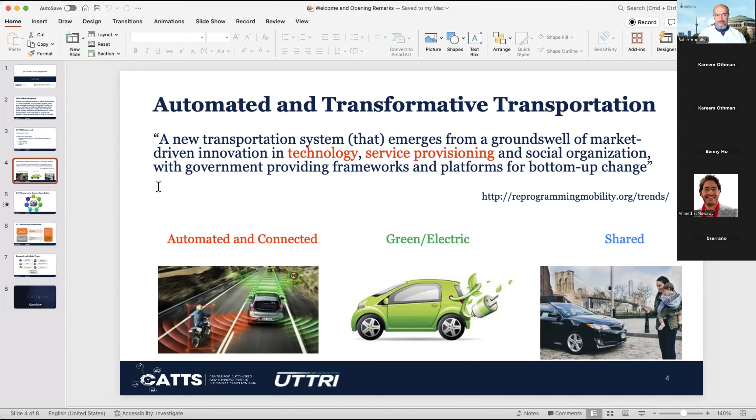But obviously, the elephants in the room are the so-called ACES, which are automated and connected vehicles, electric vehicles, and shared mobility. In CATTS, we try to ask the key questions because we don't want to speculate. For instance, you hear speculations that automation would increase demand and increase urban sprawl. Others say no, it will increase the capacity of the infrastructure and hence help congestion. So there are positive and negative speculations about the ultimate impact of these new technologies.

So in CATTS, we try to take an academic approach to this, where we identify the key questions and then analyze demand and supply. Is demand going up? Is supply performing better, or is it the opposite, that demand will go down? And perhaps the capacity of the roads will also go down, because adaptive cruise control, for instance, leaves quite a bit of space in front of cars, and therefore there will be a deterioration. So we have to analyze what the true impacts are on demand, supply, and system performance, and quantify the effects in numbers. Is it 20% improvement, 40% improvement, or the opposite?

And then predict future scenarios, how cities will evolve around those technologies, and come up with evidence-based research that informs policy, so policy would be based on rigorous analysis and quantitative numbers. We also try to create control systems to manage the infrastructure in the presence of those technologies in order to optimize the future system. So this is pretty much our mission.

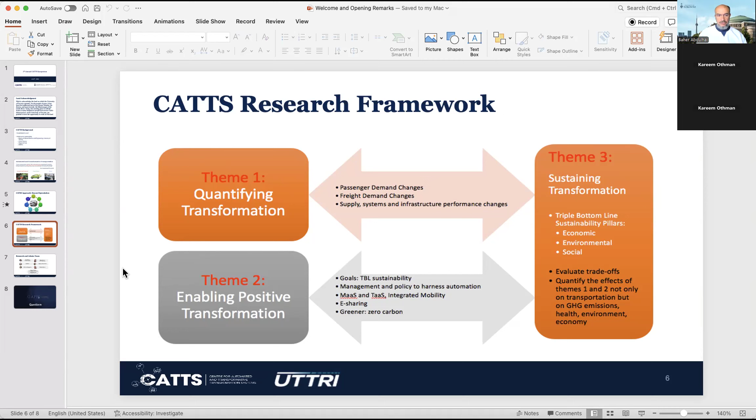So this is pretty much an intro to what we do. The professors involved in this are Professor Amer Shalaby and myself. Amer is a transit expert. Myself, I operate in traffic control and management. And then Professor Eric Miller and Professor Khandker Habib, both of them are in transportation planning and demand analysis, so the demand side of transportation.

And then Professor Marianne Hatzopoulou, she is the environmental expert in our group, and Professor Matthew Roorda, it's freight and logistics. And then we also have two staff members, Dr. Kareem Othman, who is a postdoctoral fellow, and Dr. Toka Mohammed, who is a research associate.

So this is just a quick overview of who we are. I'll stop there and need to stop sharing.

And then today we have a full day ahead of us. We'll start with a session on traffic AI in the morning, and then we'll take a break at 10:45, and then we'll go to another session on behavioral modeling in the context of emerging mobility. Then we'll have a lunch break, and then we'll have a guest speaker from the City of Toronto, Mr. Roger Brown, who will talk to us about transportation challenges in Toronto and the way forward. And then we'll finish the day with a session on innovations in freight, logistics, and air quality modeling.

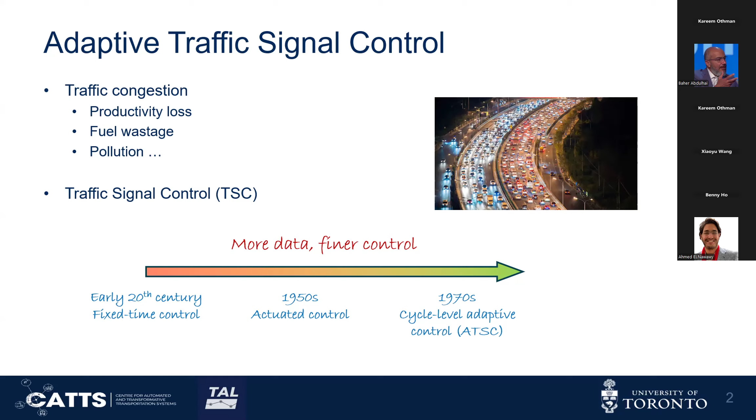But till today, there are many people, my friends, my colleagues, who come to me. They heard that I'm doing traffic research, and they just ask me, why am I experiencing this? Sometimes I'm driving towards an intersection, and it seems like I'm the only vehicle at this intersection, but I still got a red light. They start complaining, what are these traffic guys doing? Are they doing something wrong?

So based on this question, we will see another more concrete example of why this is hard to resolve. But as a result, today we're pursuing having modern second-level adaptive control solutions.

For example, if you have cycle-level adaptive control, it's hard to make individual vehicles satisfied, because in that case you're optimizing over traffic flows. That's why we need even more fine data and even finer control.

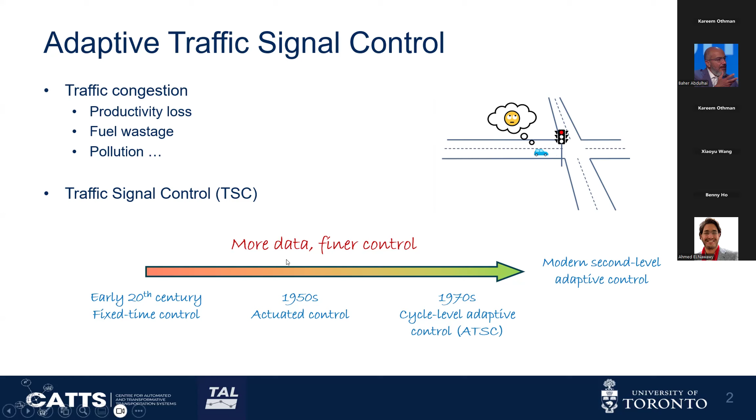So ideally, if we say we're controlling a corridor or even a network, an ideal approach is to have an Oracle centralized agent which observes globally and optimizes the target subnetwork globally. But the downside is that it's intractable, it's too complicated.

So from the learning perspective, we can have multi-agent collaboration, for which we developed a method called eMARLIN, the basic eMARLIN. When we are controlling either a corridor or network, we have a set of agents which each control an individual intersection, but they're not independent. Each of the intersections will collaborate with its close neighbor.

So the agent will first compress the raw observations with the eMARLIN encoder. Then these embeddings will be broadcasted to the immediate neighbors, and the neighbors will aggregate all this abstracted information, which is an abstraction of the raw observations of each agent. After aggregation over the neighborhood, agent I will make a decision based on this joint abstracted observation. It saves us computational complexity, and it also saves us communication complexity.

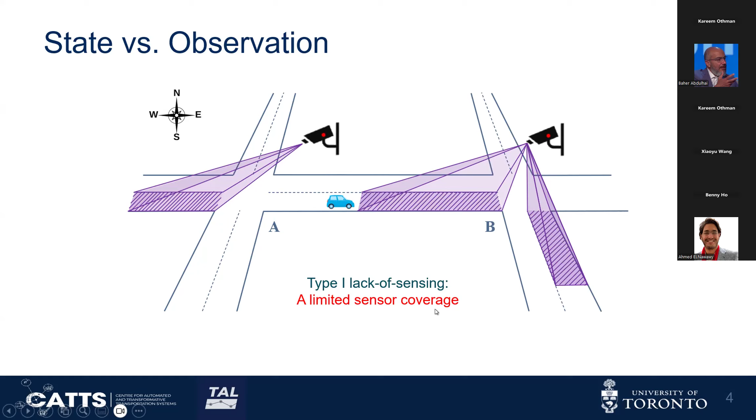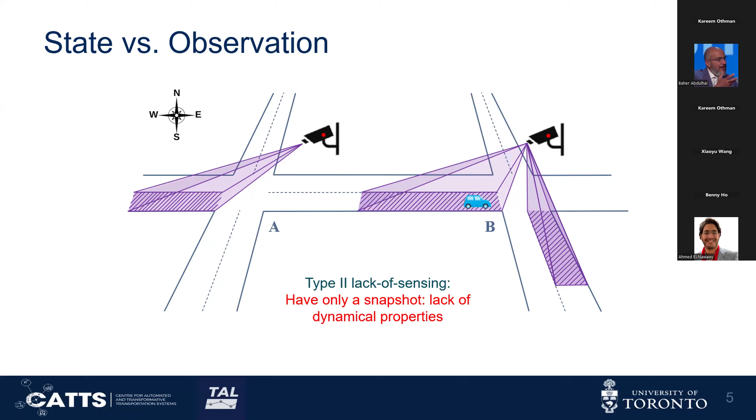So this vehicle keeps moving forward and joins the detection area of intersection B. Then there's a second type of lack of sensing: we only have a snapshot of the real world. There's a lack of dynamical properties, because with the surveillance camera you can use modern computer vision technologies to capture the position of the vehicle, but what about acceleration rate and whether the pedal is pushed down? All those dynamical properties you can only estimate from the videos, or from the differences between frames of the video. You cannot get precise traffic states in this sense.

So with those two types of lack of sensing in mind, let's take a look at this scenario, where you have a platoon of three vehicles coming eastbound and a single vehicle coming northbound. Currently intersection B should be eastbound green, not northbound green, but anyway it's idling because no vehicle is in its detection area. Meanwhile intersection A sees the platoon and allows it to pass through, because this is the only movement where there are vehicles.

17 seconds later, this vehicle approaches the stop bar, and intersection B sees there's no eastbound vehicle in A or B, in both detected covered areas there's no vehicle at all. So maybe it should allow the northbound vehicle to pass through first. But notice, once this intersection changes phase, it will suffer from a blackout period, because the traffic light will go through the yellow phase, the all-red time, and serve the minimum northbound green time, which is usually determined by the intersection layout.

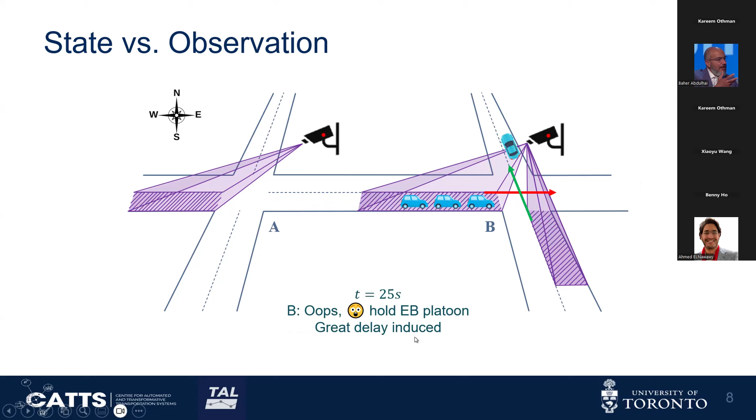But as B is not able to see the three vehicles, it allows the northbound vehicle to go through. But 8 seconds later, it starts holding the eastbound platoon, and a great delay will be induced because of the blackout period.

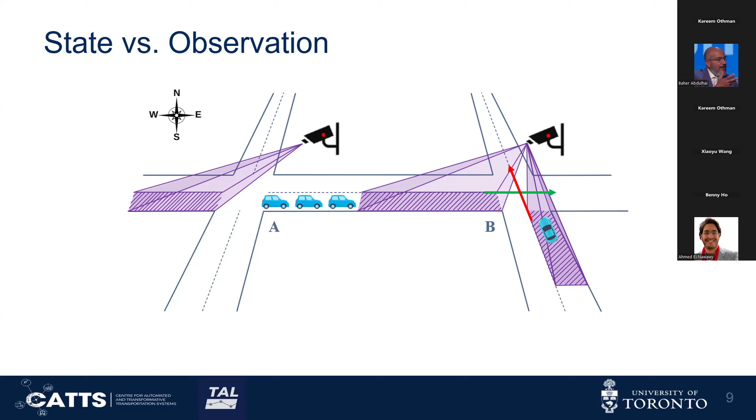So we don't want the agent to make these kind of unintelligent, unwise decisions. What can we do? At t equals 17 seconds, what else can the intersection be aware of rather than the raw observation, which is like video readings? Is there a hint of the existence of this platoon?

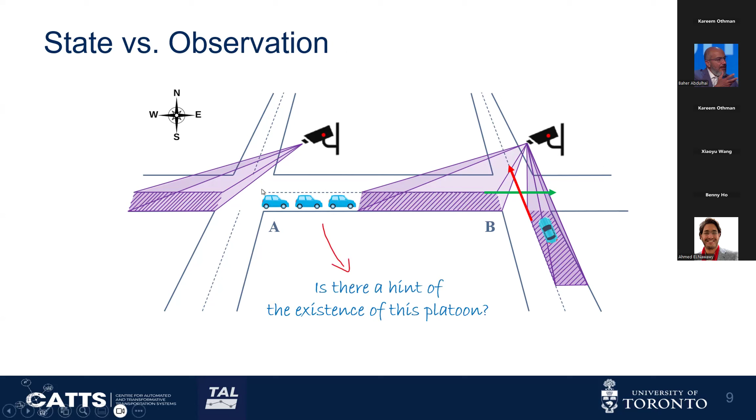Luckily, the answer is yes, because if you recall, 10 seconds back this platoon was released by intersection A. So it existed in the history of the sensing from intersection A. So intuitively, we would say history matters.

We can augment the agent's input with a short history of the observations. This is not a tutorial on reinforcement learning and Markov decision processes, so we'll just say mathematically there was a non-Markov issue in this case, and including the history will compensate for that. It will alleviate the problems caused by this non-Markov property.

The history of observations in each agent and the executor of the eMarlin architecture stays the same. What about the complexity of the data input? For example, if you put 20 seconds into the history, then your input space is exploding. So in order to handle the sequential data efficiently, we introduce transformers.

This is a cornerstone, the backbone of modern generative AI technologies. Most people use ChatGPT or some large language model, and Transformer is exactly the backbone of those models. However, reinforcement learning is sensitive to neural network architectures, and Transformer, on the other hand, suffers from large memory footprints and high latency.

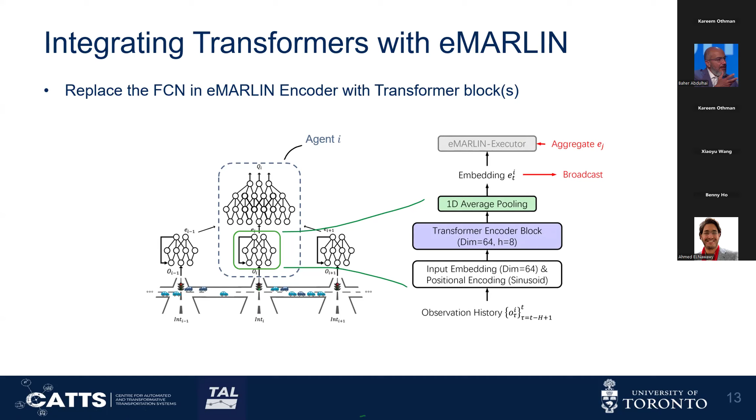So in our research, we put the transformer block into the eMarlin encoder module. Beyond that, we need some other better practices which enable eMarlin to work well, because we need to address the two adaptive issues we previously mentioned. In terms of implementation practices, in this work we're using the canonical transformer block, which is the most classic one.

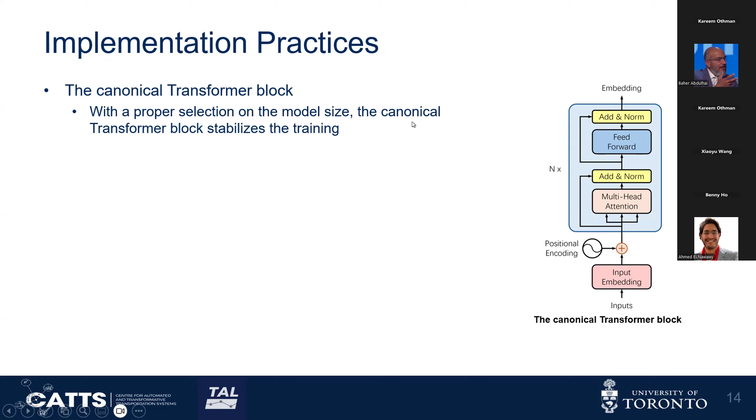We noticed that with the proper selection of the model size, the canonical transformer block can actually stabilize the training. It can avoid the issues mentioned before, like the large footprint requirement and the unstable learning when transformer and reinforcement learning happen together.

Secondly, we noticed that in our case, sequence alignment is important because you want to have a semantic meaning for the sequences, and the current time slice is the most important one. When you're dating the current slice back to a horizon of H, you want to align each of the sequences to the current slice, which tells the agent which frame in this sequence it should really focus on.

Thirdly, we need to do padding and masking properly, because if you don't mask out void slices, those zeros actually have meaning in traffic states. For example, it could mean there are no vehicles, the vehicles stopped, no speed, and so on. So you can't just let those padding slices go through the whole eMarlin architecture.

Why do we need to have the partial observability, PO, addressed? The benefit is that with PO being addressed, we can develop a sensor-agnostic architecture. This whole solution can be adopted to any sensor scheme you have in mind.

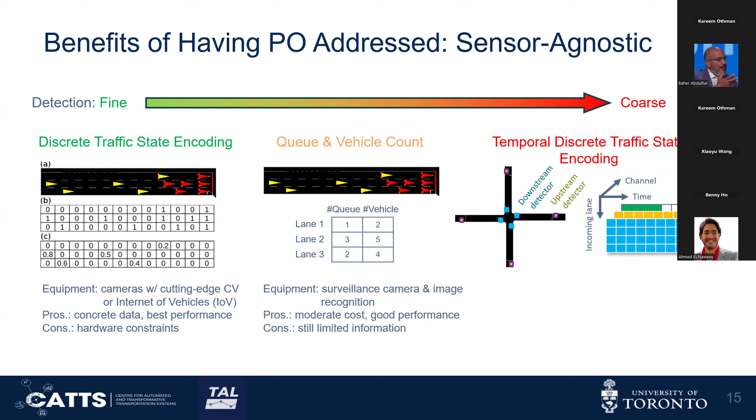So how can we show that eMarlin X is this powerful? We do experiments in the York Region, where the central intersection is the Yonge-Steeles intersection, and we focus on controlling the 5 intersections along the Yonge corridor. We strictly adhere to the FHWA NEMA scheme. Although we're doing second-level adaptive control, we don't allow deviation - we strictly adhere to the policy constraints.

This is what we call a constrained variable phasing scheme, developed according to the NEMA scheme. Regarding the reward, we're counting the queue length, which is equivalent to the stop time.

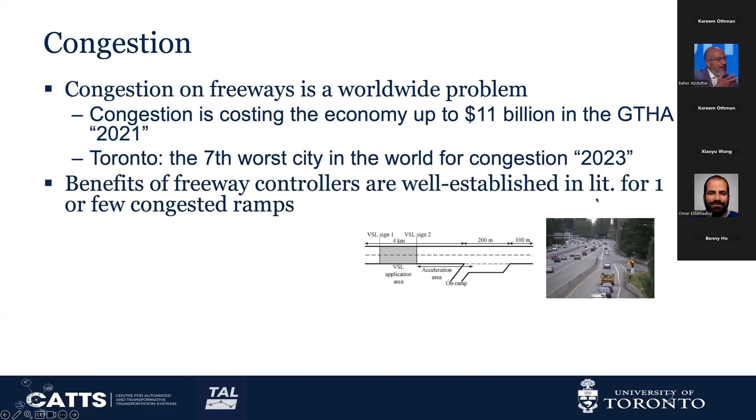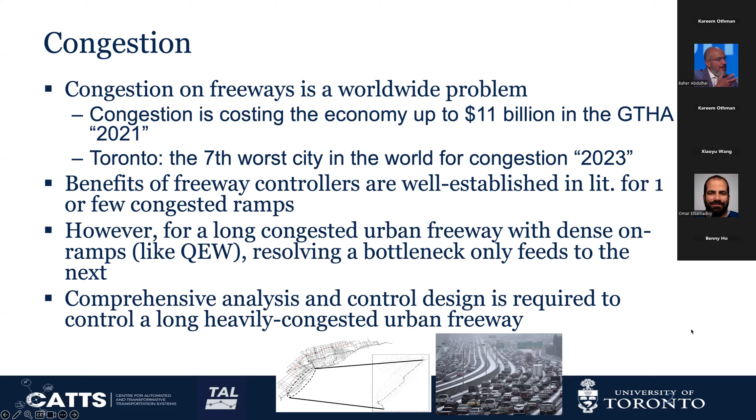Benefits of freeway controllers are well established in literature for one or a few congested on-ramps. However, for heavily congested urban freeways like the QEW or 401, resolving one bottleneck only shifts it to the next. So we need to do comprehensive analysis, and a new design for a controller is required to control such a freeway.

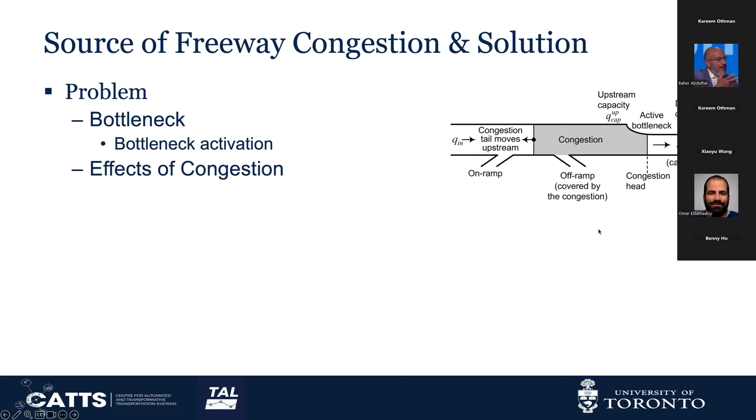First, let's talk about the source of congestion on a freeway. The problem is a bottleneck, a location where the flow capacity upstream is higher than the flow capacity downstream. Whenever the arriving demand from upstream is higher than the capacity downstream, congestion is triggered, and we have two negative effects: first, capacity drop, where the output flow from this bottleneck is lower than the capacity of the bottleneck, and blocking of off-ramps.

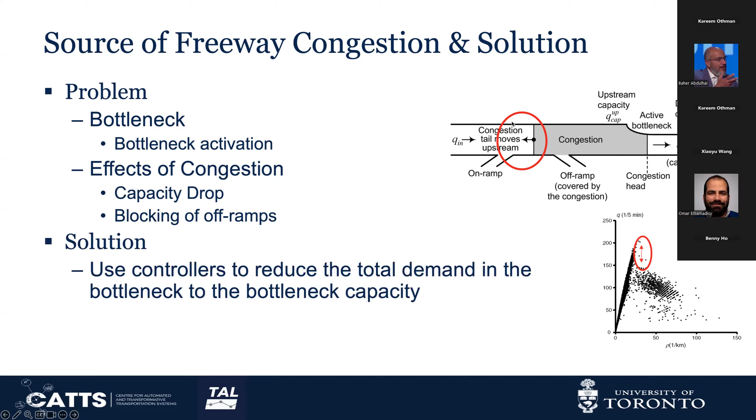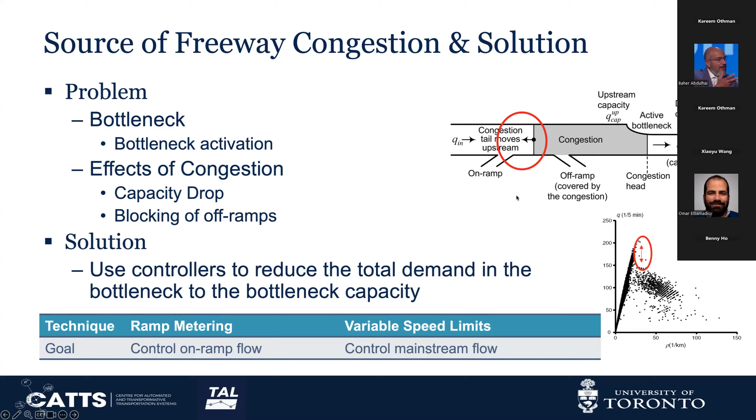When congestion occurs, vehicles start queuing and congestion grows upstream, blocking off-ramps. Vehicles that want to exit the freeway keep waiting, increasing congestion and travel time for everyone. The solution is to use controllers to limit the flow entering a bottleneck location to the bottleneck's capacity. This can be applied through ramp metering, by controlling the flow entering from the on-ramp, or variable speed limit, by limiting the flow entering from upstream.

There's also the same integral regulator rule for variable speed limit, which controls the speed upstream based on the same rule and goal density. When we apply both together, we apply ramp metering first, and then variable speed limit is applied whenever ramp metering fails to resolve congestion. All controllers are implemented using Aimsun APIs.

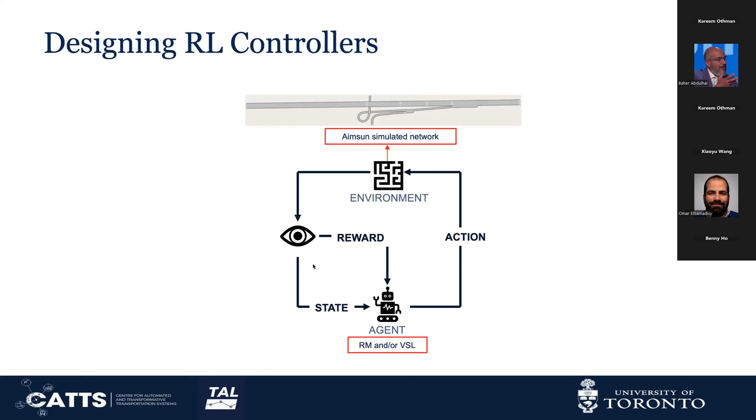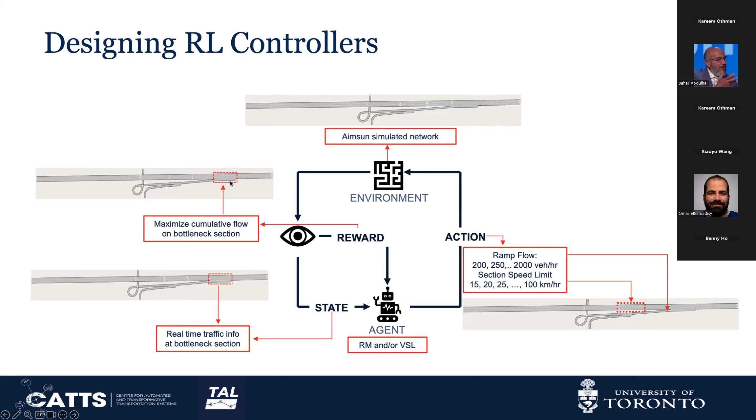When we design a controller using reinforcement learning, the agent is either variable speed limit or ramp metering. The environment is the traffic network, the Aimsun simulated network. The state is the real-time traffic info at the bottleneck. The action is either the ramp flow or the section speed limit, or both if we want to apply both. The reward is simply the output flow from the bottleneck, which reflects total travel time. If we maximize output flow at the bottleneck and get more vehicles out, that's equivalent to minimizing total travel time at this location.

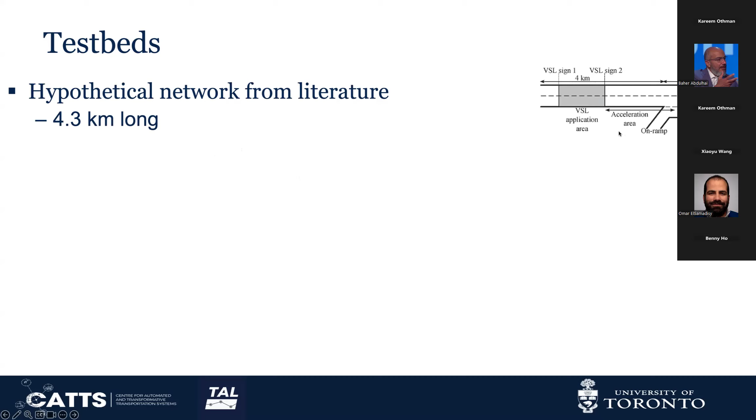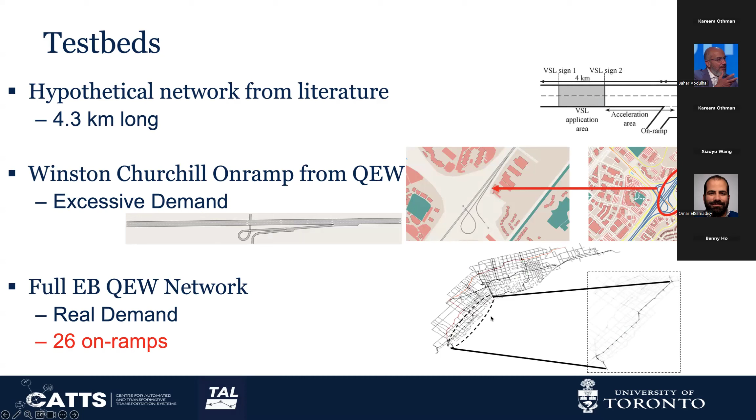We applied these controllers, both reinforcement learning and regulator-based, on several test beds. The first is a hypothetical network from the literature, very popular in the literature. Then we have Winston Churchill on-ramp from QEW with excessive, very high demand. And then we have a full eastbound QEW network with 26 on-ramps with calibrated real demand, which we applied the controller to.

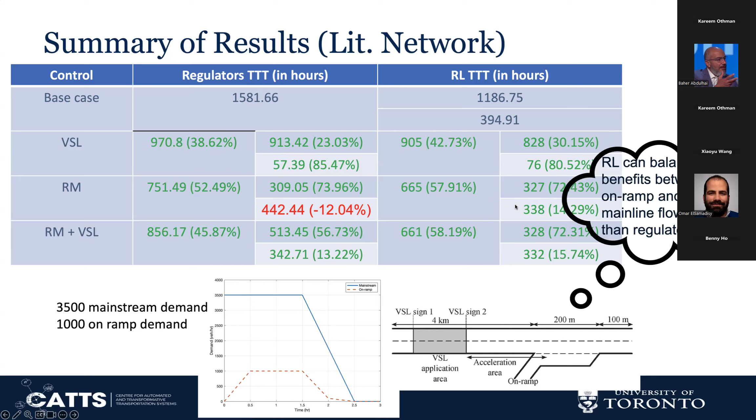So all are benefiting. When we go to the tertiary network with excessive demand, we see a 3-lane freeway, not 2 lanes, with 6,000 vehicles coming from the mainstream, almost at capacity without adding any ramp flow. So we can see clearly that we have critically high demand.

In this case, variable speed limit applied to the mainstream is not very effective - we only get about 0.3%, or at maximum using reinforcement learning, a 3% decrease in total travel time, while ramp metering is still effective even in this highly congested scenario, getting benefits still in the range of 44-45% decrease in total travel time. We can learn that at very high congestion, variable speed limit might not be very effective.

So we take these results and apply them to the QEW network. For the full network starting from Hamilton to the Gardiner Expressway, applying ramp metering gets us about 14-15% benefit when ramp metering or coordinated ramp metering are applied, while variable speed limit is only 3.25%.

When we look at the heat maps, we can see clearly that variable speed limit is not very effective - only about 3%. When we looked into the reasons behind that, we found that the back-to-back ramps feeding more vehicles into the freeway is a very challenging condition for applying variable speed limit, because variable speed limit needs space.

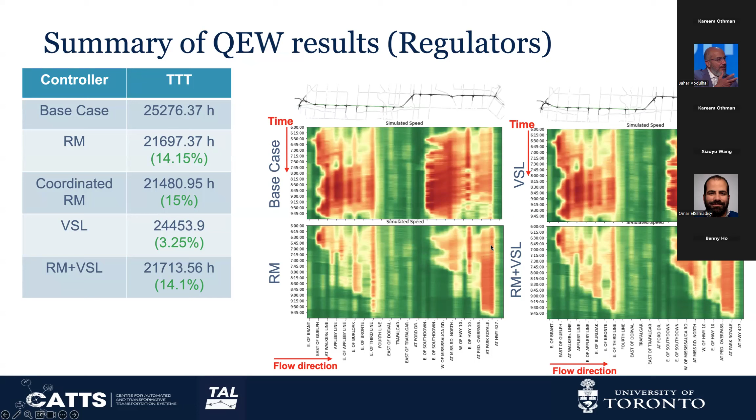So we looked into each region individually. We found that upstream at early regions, like Third Line and Erin Mills regions, we can get very high performance from ramp metering, like 40%, 50%, and sometimes more, like in Erin Mills.

However, we lose part of this benefit downstream when we go to Cawthra or Dixie region. We have an uncontrolled scenario where vehicles have very high demand coming from upstream, so we can lose up to 77% and 65% increase in total travel time.

So for ramp metering, we give priority to mainline demand, and for a large network, we have significant benefit upstream, which we push downstream, that can increase the delays and create a very challenging situation downstream.

For variable speed limit, when we have higher demand or very high congested scenarios, variable speed limit alone is not enough, and it gives priority to ramp demand. However, we don't have space to store vehicles on the mainline.

Taking these results, we design a ramp metering solution for QEW in collaboration with Xiaoyu, as discussed in the traffic signal work. We adopted and extended eMARLIN for traffic signal. We design the controllers such that all upstream controllers look at downstream ramps and collaborate with them.

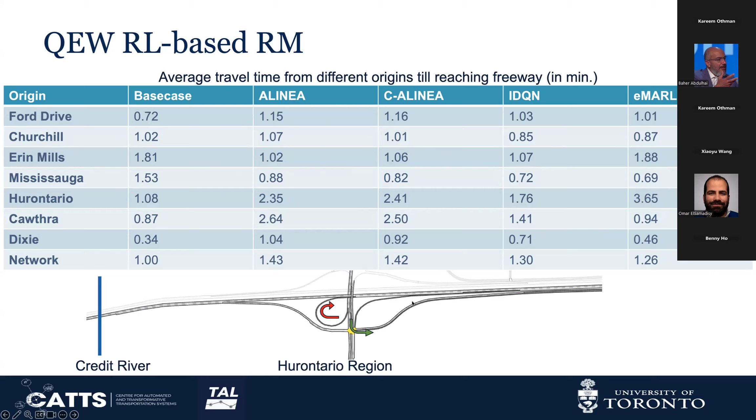Conclusions from this work: any control in any case is better than none, for QEW or isolated ramps. Whenever we apply control, we get some benefits. For ramp metering, it's better than variable speed limit in highly congested scenarios.

Reinforcement learning based controllers outperform regulator-based ones. We have significant benefits for coordinated ramp metering compared to isolated control.

We found, as mentioned, the ability of eMARLIN to learn how to decrease or increase the flow from each ramp to control the route choice of vehicles. So it tightened the demand at Hurontario to make travelers take the South Service Road, which benefits everyone in the network.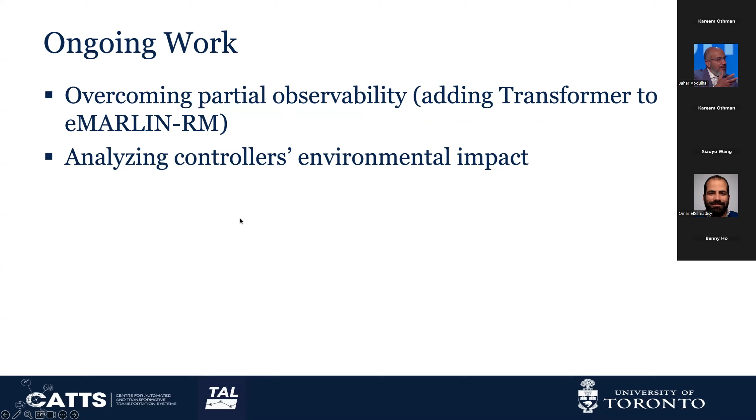For ongoing work, we are applying eMARLIN transformer to overcome any partial observability issue in our controller, and analyzing the controller's environmental impact. That's all for today. Thank you.

I'm not sure if I have to share my screen. So we have the speed reduction.

We can see that what's achievable in the simulation can be achievable in real time because we have calibrated demand, which reflects traffic performance of the real world. So if we have a decrease in total travel time or increase in speed, it can be achievable if we have a correctly calibrated simulation, which I think is the case here. We have calibrated the network so that we reflect how the fundamental diagram, or the relation between the driving behavior in Ontario on the QEW, matches what we have in the simulation.

If I understand the question correctly, he's asking how do you get people to slow down? Is it a changeable message sign? Is it in the simulator? How do you enforce variable speed limits?

For variable speed limit, it's like a message sign at a controlled section. If we look at the network, we have a controlled area where we apply the variable speed limit with a message sign. However, we didn't model a compliance rate. We modeled it so that when we put 30 kilometers per hour, everyone in this area applies 30 kilometers per hour. We didn't model how some people would not comply. However, in literature, there are studies showing that if 30% or 40% of vehicles are controlled and comply with this speed limit, everyone else will be stuck behind them and won't have a chance to overtake.

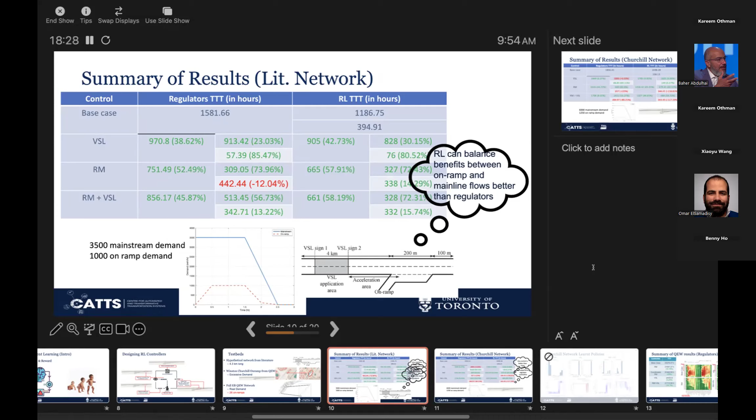Any more questions? If not, then thank you, Omar. Is there another one?

Can dynamic sign speeds be enforced? Sure, if there is a speed limit and you violate it, it can be enforced in many ways. Cops can stop people and give them tickets, or you can have radar enforcement, for instance. So the enforcement part and the implementation are not difficult. Now, what people object to politically, that's a different story, but in terms of executing the speed limit and enforcing it, the technology is readily available.

Like how speed changes at construction areas, for example, it's a variable message sign instead, and it's enforced at construction areas. If speed falls from 100 to 80 or 70, it's enforced, and if you violate it, you will get ticketed most of the time. So I think it's the same thing, but instead of having a static speed limit, it will be variable using a message sign.

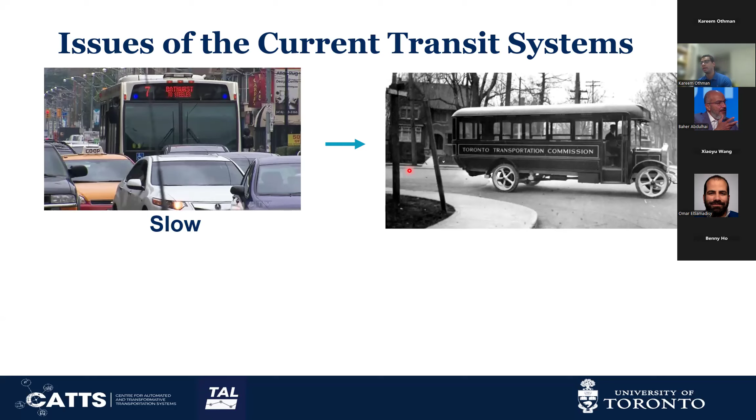Transit is frequently characterized as a slow service. When you look at the history of public transit, the current transit speed is not really faster than it was a century ago - we have almost the same average traveling speed. When transit is competing with other modes, you find that transit is actually at a disadvantage. For example, comparing transit to driving, the average traveling speed is significantly higher than average transit speed, and in some scenarios even cycling is faster than using public transit.

So what is the meaning of slow transit service? It means higher operating costs for transit agencies and customer dissatisfaction. In that case, people will start looking for other modes to shift to - they might prefer cycling, they might prefer driving, and they might shift from using public transit to other modes.

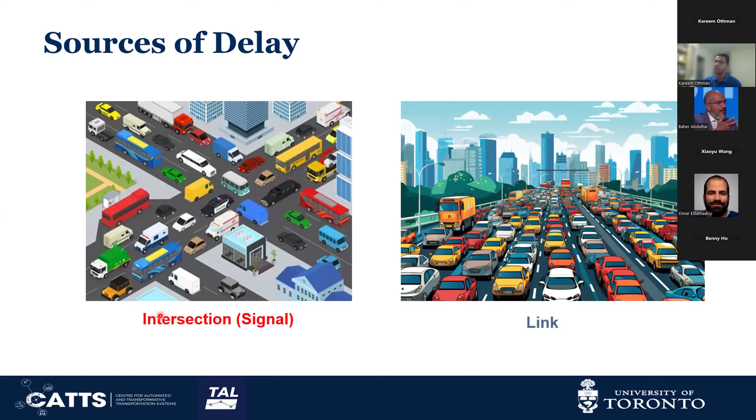So what are the main sources of transit delays? We have intersection delays, including traffic signals, and we have link delays. For our work here, we focus on intersection delays. When we look at dense urban areas, around 35% of transit travel time is actually spent at intersections, highlighting the importance of dealing with intersection delays.

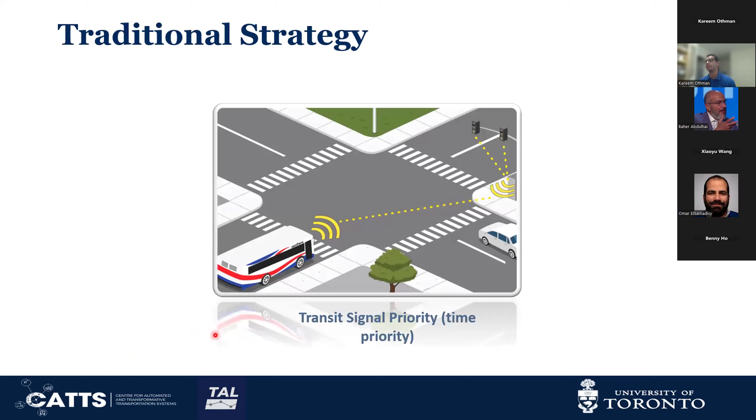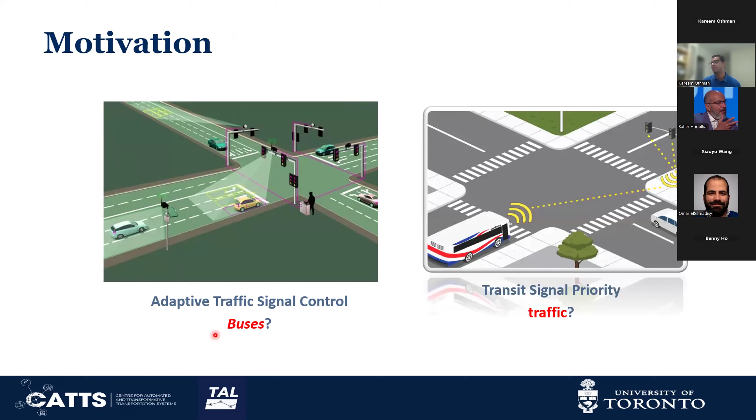Traditionally, transit signal priority will be implemented to prioritize transit at the intersection. However, the main issue is that you prioritize transit at the cost of traffic. On the other hand, adaptive traffic signal controls are mainly optimized based on traffic demands - what about buses? They don't really look at what happens to transit. And transit signal priority doesn't really consider traffic.

Again, we get back to the same picture: either prioritize transit at the cost of traffic, or do nothing and have slow transit service. So there is no strategy that actually adaptively reduces delays for both. Our main objective in this work was to provide a multimodal adaptive traffic signal control for everyone - for transit and for traffic.

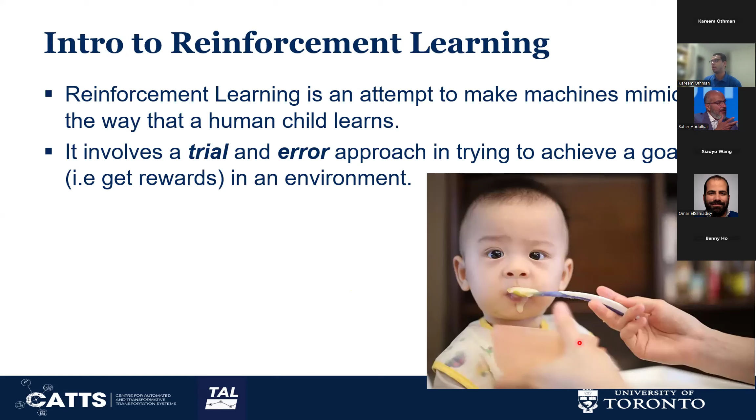So we have been using reinforcement learning. I know you should be familiar with it by now, so I'll just go over it very quickly. Reinforcement learning is pretty much similar to a baby - it actually mimics the way a human child learns, and involves trial and error in order to achieve certain goals. It learns by interacting with the surrounding world, and learns over time.

So this is a very famous reinforcement learning figure. You have your agent taking action, changing the environment, and based on the changes in the environment, the agent will receive a reward and will receive the new state of the system.

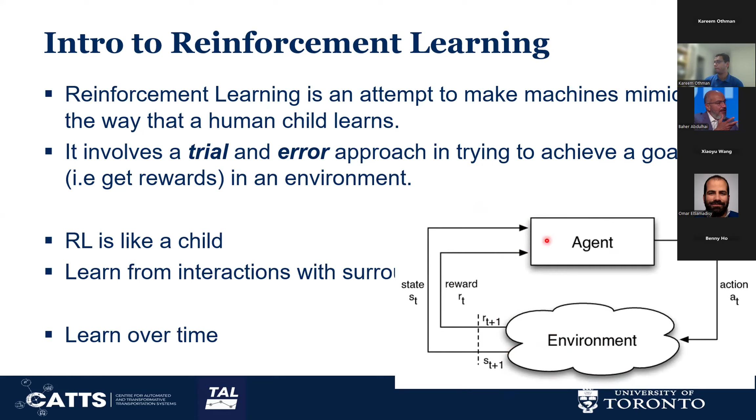There are a lot of examples for applications of reinforcement learning. I won't open the video now, but it has been used for many applications like hide and seek games, parking cars, and as you've seen in the previous two presentations, traffic signal control and ramp metering.

So we have been using it for our problem here, and again, this is the same simulation network that Xiaoyu has presented - the Yonge and Steeles intersection. Our main goal is to provide a multimodal adaptive traffic signal control to optimize conditions for both transit and traffic.

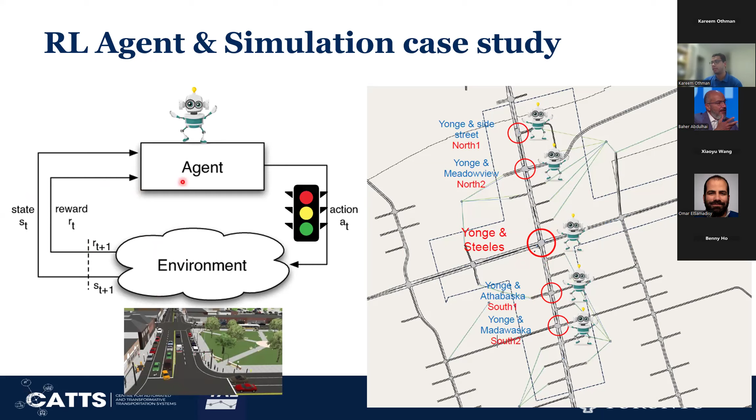In our simulation, our agent is the traffic signal controller, and it takes an action regarding the traffic signal - which direction to give the green phase and for how long. It interacts with and changes the environment, which in our case is our simulation model. Based on the changes received, the agent gets the reward value and the new state of the system.

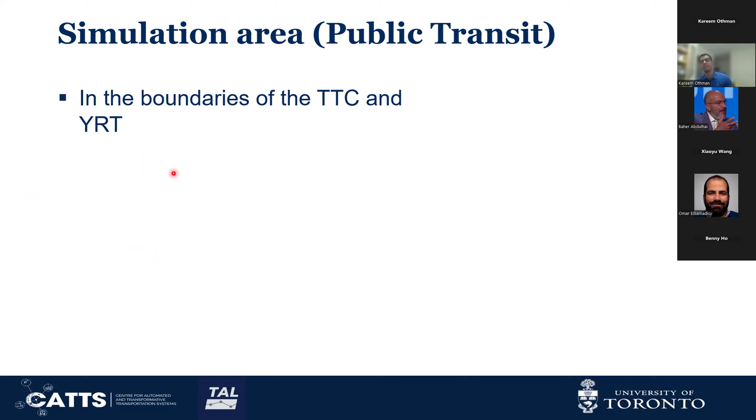Let's look at our simulation area from a public transit perspective. Our simulation area is within the boundaries of the TTC and York Region transit service areas. This is a screenshot from the TTC website showing the transit routes that use the simulation area, and we have 4 high-frequency TTC bus routes: 60, 53, 960, and 953.

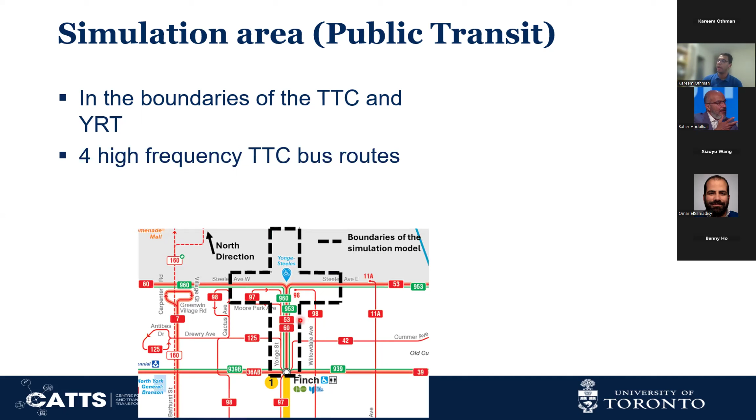When we look at York Region, Finch GO is one of the main hubs for York Region transit, and most of the transit routes pass through our simulation area - this is the Yonge and Steeles intersection. We have 16 York Region transit routes using our simulation area, with high and low frequency.

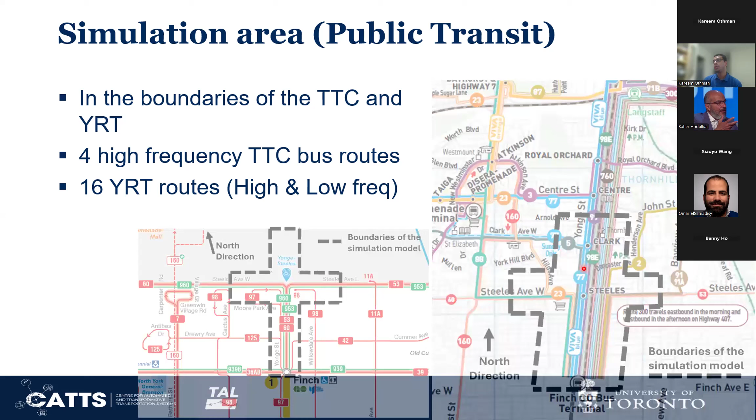Looking at the combined headway, the TTC combined headway is around 1.9 minutes, with a combined frequency of around 31 buses per hour. For York Region, the combined headway for all routes is around 1.8 minutes, showing the number of buses using the simulation area in 1 hour - a combined frequency of around 65 buses per hour trying to use the intersection.

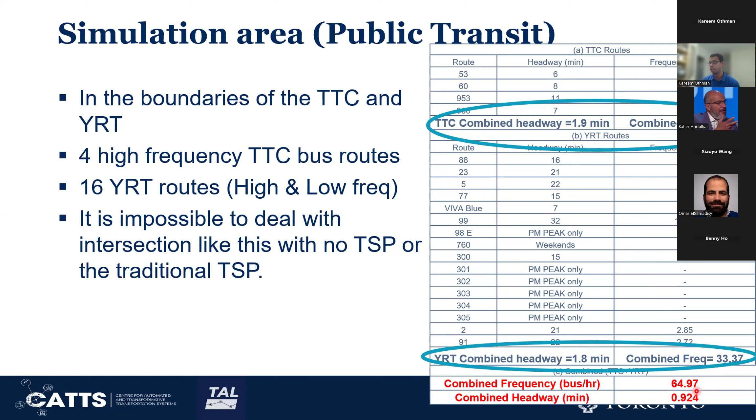It's not really possible to handle an intersection like this with no TSP or using traditional TSP, because traditional TSP systems usually consider only the first request and ignore the remaining buses entering in one cycle.

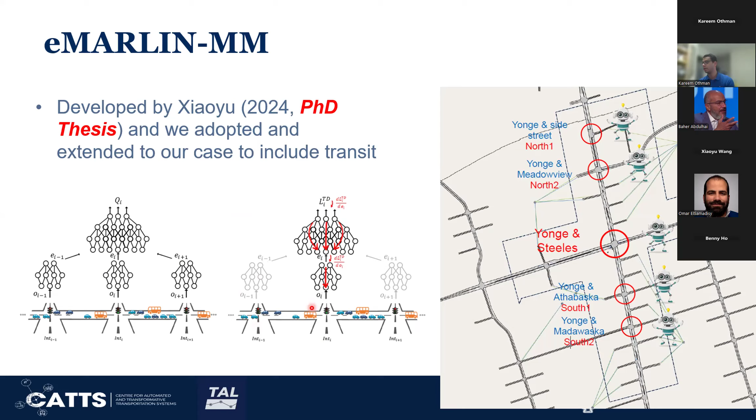We tested two adaptive traffic signal control systems. One is vehicle-based, where the main objective is to minimize vehicle delays and doesn't consider transit - a bus with 50 passengers is dealt with similar to a passenger vehicle with one passenger. On the other hand, the person-based reward tries to minimize person delay, taking vehicle occupancy into consideration.

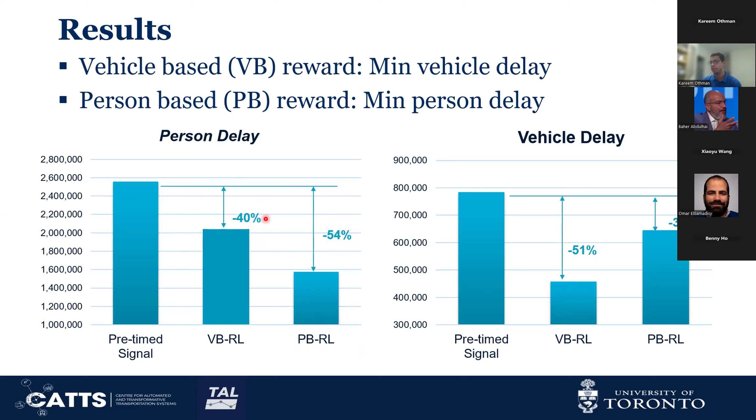But what we really care about is the person delay - trying to minimize the overall person delay in the system. Here we see the opposite happening: the person-based reinforcement learning adaptive traffic signal control achieves around 54% reduction in person delays, higher than what was achieved using vehicle-based reinforcement learning.

We then tested the efficiency of these two systems - vehicle-based and person-based - at different levels of bus occupancy. In this figure, we show vehicle delay with bus occupancy from low to intermediate to high on the x-axis, and on the y-axis the percentage change in total vehicle delay compared to the benchmark pre-timed traffic signals. At low bus occupancy levels, both vehicle-based and person-based achieve basically the same results.

With the increase in the level of bus occupancy, you will see that the vehicle-based method is not really affected, because it's just trying to minimize the overall vehicle delays, so it doesn't really get affected by the bus occupancy. But on the other hand, the efficiency of the person-based method is actually decreasing with the increase in the bus occupancy. But again, this is not what we really care about.

What we really care about is to minimize the person delay. And again, this is the same figure, but for person delays for the two methods, the eMarlin person-based and the eMarlin vehicle-based. Let's look at the vehicle-based.

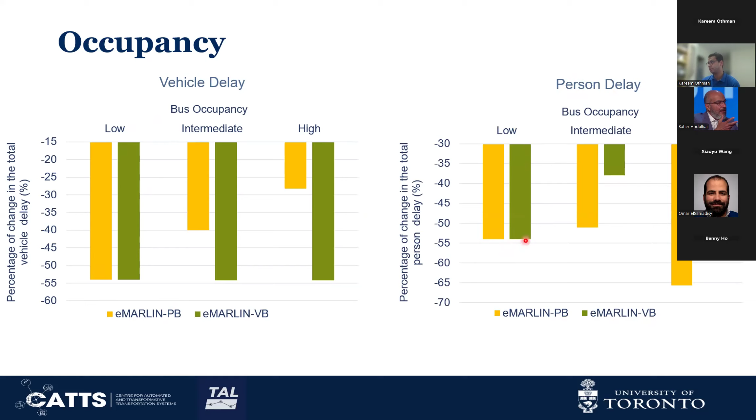So basically, for the vehicle-based reinforcement learning shown in green here, you will find out that the efficiency of vehicle-based methods is actually decreasing with the increase in the bus occupancy, because this method is blind to the level of bus occupancy, it just optimizes for vehicle delays.

But on the other hand, you will have the person-based method actually increasing the efficiency of the system with the increase in the bus occupancy, because you are taking the level of occupancy into consideration, and the level of occupancy is actually part of the optimization problem.

So this is actually showing us that the person-based methods can automatically adapt to different scenarios, and we can see that when compared to the vehicle-based method, person-based is actually superior, especially at intermediate and high occupancy levels, and it actually offers adaptive priority.

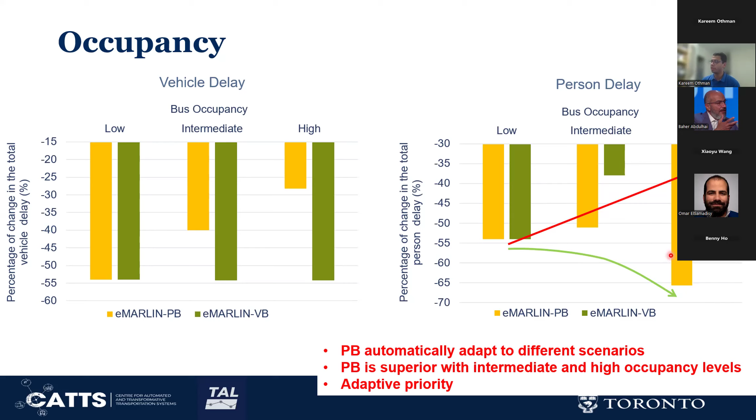So basically, the final conclusions of this work: we have seen that eMarlin, basically the person-based eMarlin, can achieve significant reductions in person delays, around 54% reductions.

And at low bus occupancy rates, both the vehicle-based and person-based methods converge and achieve basically the same results.

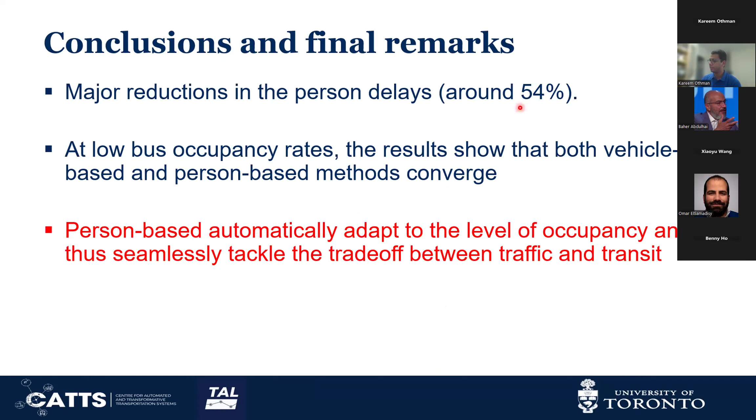And finally, we have person-based methods can actually adapt to the level of bus occupancy, and it can actually tackle the trade-off between traffic and transit. In other words, it actually resolves the conflict between TSP and the traditional adaptive traffic signal controls that only consider traffic in the optimization problem.

And that concludes my presentation. Please feel free to ask questions.

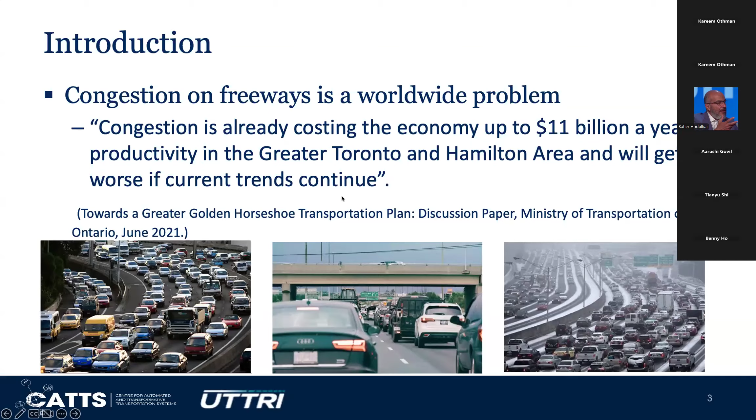So firstly, we will talk about the microscopic versus macroscopic. From the microscopic, we mainly use the CAV model for control. In this problem, we have the leader vehicle and follower vehicle, and we try to optimize the autonomous driving vehicle's behavior to improve, for example, the micro efficiency such as headway, speed, and improve safety. So the overall result, we want to develop a CAV model that can achieve the same effect as controlling the infrastructure level. For example, we also want to, from the macro level part, maximize the throughput, mitigate the total travel time. So this is the main focus of my research.

In my research, I did several literature reviews. We find that in previous literature, most RL car following models just mimic human driving behavior. They don't have the best performance in terms of efficiency. Also, they don't have the speed limit as a target in their car following model. They neglect the dependence on both leading and following vehicle, so that means they have a unilateral view.

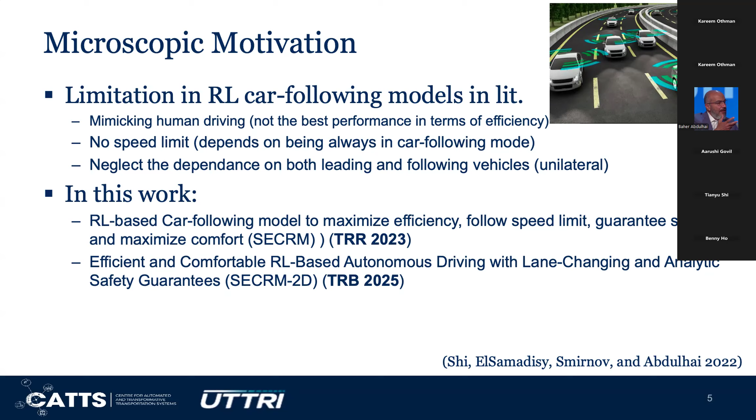This is what we refer to as the SECRM-2D model. Firstly, we will introduce the concept of our SECRM model. We know headway significantly impacts traffic performance; it will impact the efficiency.

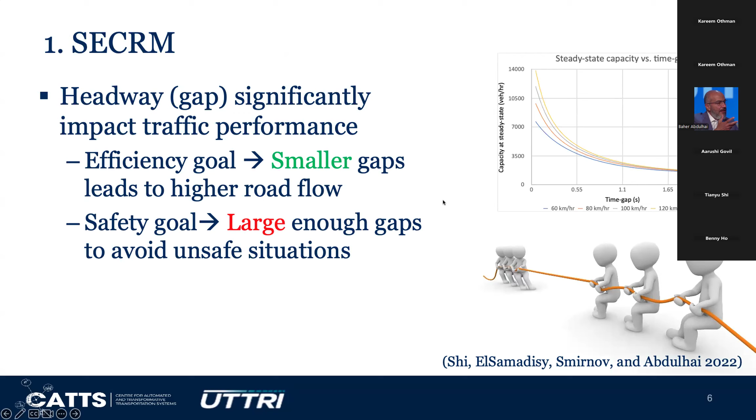For example, a smaller gap leads to higher road flow. Also, it will impact the safety — a large enough gap will avoid unsafe situations. So we know this is a trade-off between safety and efficiency. So next, the question is how we can deal with those conflicting goals.

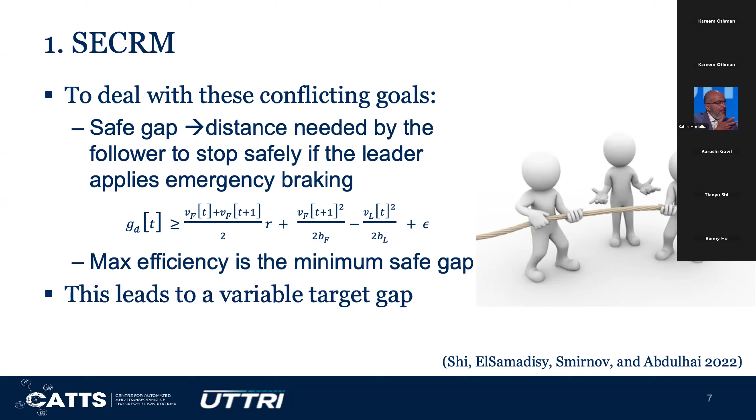So we want to formulate a target gap that can guarantee safety by making the follower stop safely if the leader applies emergency braking. Furthermore, we want to maximize the efficiency and make sure this is a minimum safe gap. So in this formulation, we can formulate a variable target gap.

So this is the concept of our SECRM model. We propose that no target gap setting is always optimal — a given gap will either be inefficient or unsafe. So our model, we want to formulate a target gap that can guarantee safety while maximizing the efficiency.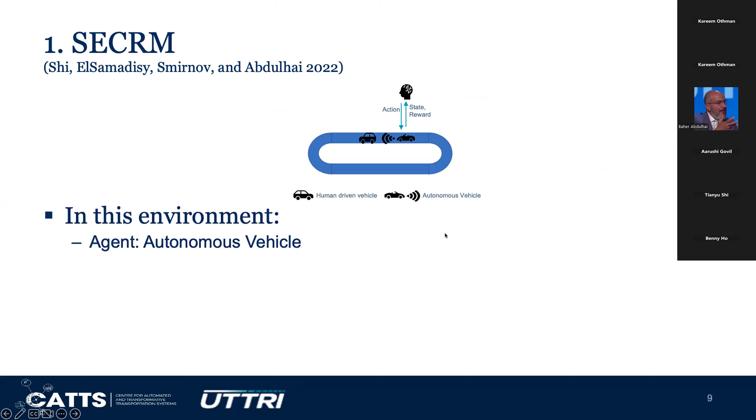Also, in our experiment, we find that learning target speed is simpler than learning target gap, so we transform the formulated target gap into the target following speed. So that's the SECRM model. When we have the SECRM model, the next question is how we can train the model to learn the behavior we want. So we use reinforcement learning. I think you guys are already familiar with reinforcement learning, and we have the agent.

The agent is the autonomous driving vehicle. In this experiment, we also can give the autonomous driving vehicle information such as vehicle speed, relative speed, speed limits, spacing, and acceleration information.

In the one-dimensional SECRM model, we aim to control the longitudinal acceleration and deceleration of the model. In other words, it is a car-following model.

So the reward is a linear combination of two components: speed and comfort. We formulate the target speed as one objective in the speed function, and we formulate comfort as another function to penalize jerk. So we can use reinforcement learning to optimize those objectives to make the model drive safe, efficient, and comfortable.

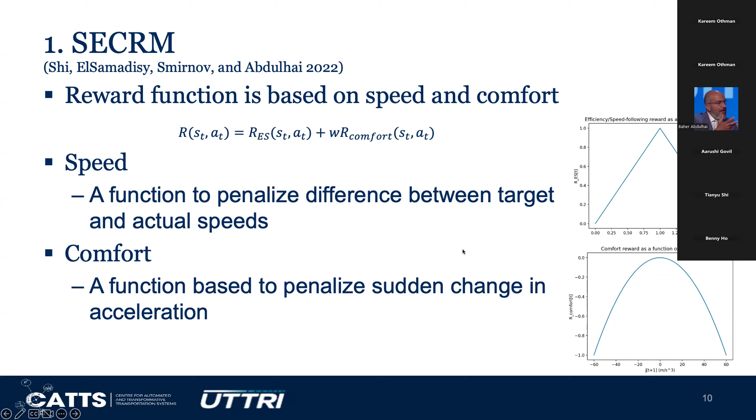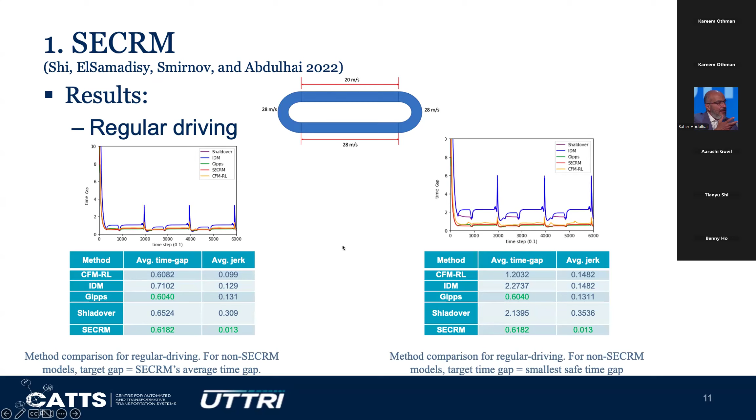We construct several experiments to validate our model's performance. We consider the ring-shaped network and compare with several human-like driving models, as well as some reinforcement learning models from literature. We find that our model performs better in terms of average time gap and average jerk.

That means our model can improve efficiency and comfort. To further validate safety, we perform another experiment where the leader vehicle takes an emergency brake.

We use the same environment and measure how our model reacts when the leader vehicle takes an emergency brake. We can see our model reacts safely without crashing, and meanwhile achieves lower jerk and lower time gap. So this is the result of the model in terms of normal driving and emergency braking.

Next, we aim to investigate how we can extend the driving model to a two-dimensional driving model by considering lane change behavior.

In terms of lane change behavior, inspired by the one-dimensional model, we formulate the target speed as two-dimensional so the vehicle can conduct lane changes. Take this graph as an example: consider we have multiple lanes. By extending it to two-dimensional, we aim to let the ego driving model follow a leader with a higher target speed.

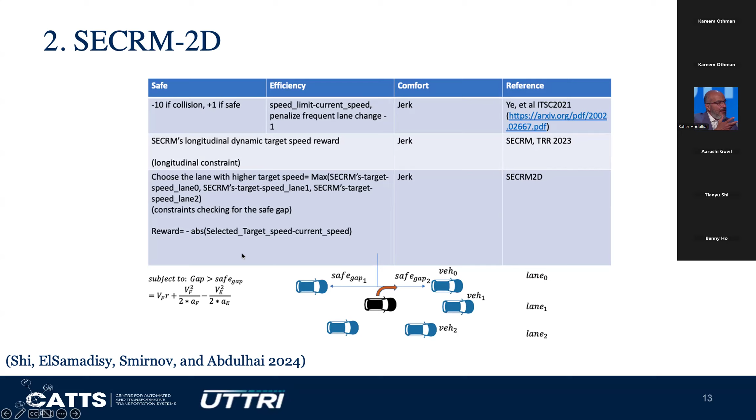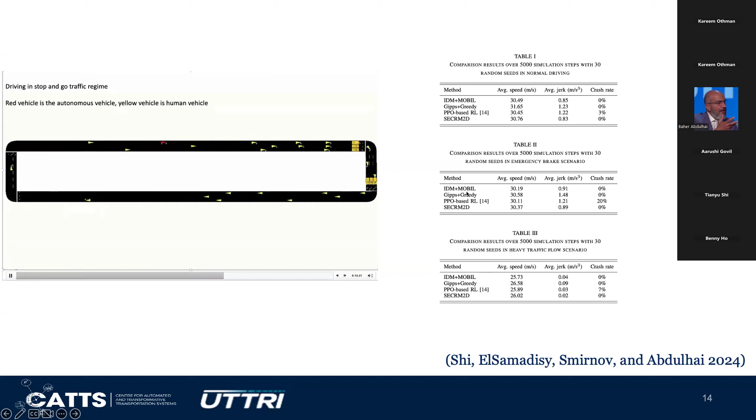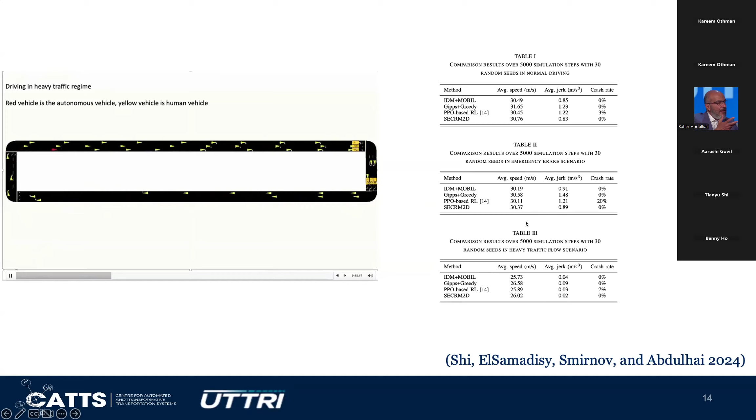We train the model in the ring-shaped network, and we also evaluate the model in several different settings, such as normal driving and emergency brake scenarios. We also increase the traffic density to make the scenario more challenging, and we compare the model with several baselines, demonstrating better performance.

We have the safe gap to the left lane, right lane, and ego lane. This constraint acts like a shield that filters out and forbids unsafe actions, so we can make our model drive safely.

In this reward function design, since we want the model to conduct lane changes, we considered both discretionary lane change and mandatory lane change. For discretionary lane change, it's easy to understand: when the model drives on the highway, it wants to improve efficiency, so it has to make the lane change.

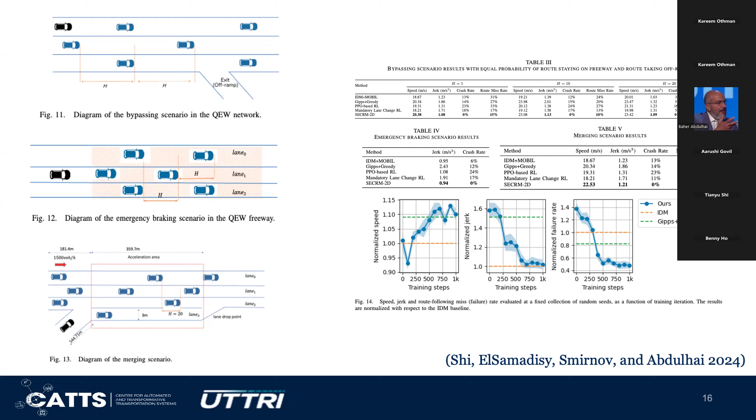Now we have a full driving model. However, we also think about that model. For this model, we think it's mainly focused on the ego driving behavior. That means it tries to maximize the driving performance of the ego vehicle, like the safety, efficiency, and comfort of the ego vehicle, but our whole picture is trying to improve beyond that.

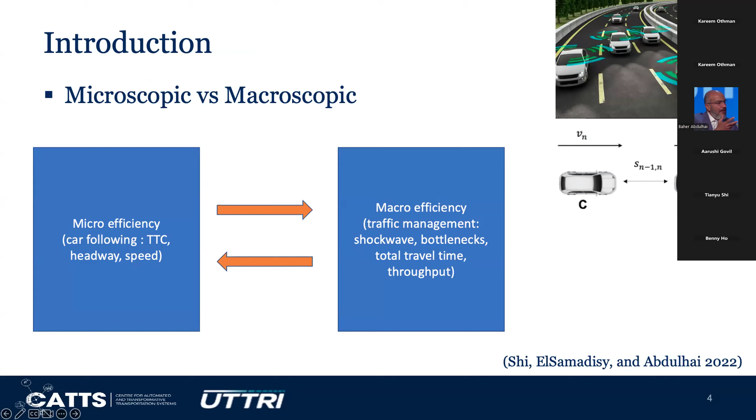We can go back to this slide. Our whole picture is trying to improve the macro efficiency and improve the traffic. So how can we achieve these goals? We are currently building the cooperative version of the SECRM-2D model. That means within the scan range, or collaboration range, we aim to motivate vehicles to collaborate with each other and improve the group behavior, so we can improve the whole traffic performance.

We consider n number of agents in its neighborhood, and we modify the reward function to consider their impact, and we aim to motivate the vehicle to collaborate with each other in order to improve the system performance. So this is ongoing research of the SECRM-2D model.

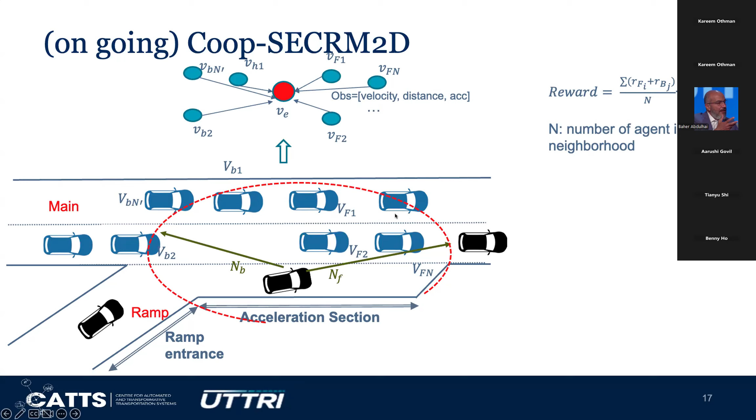Thanks for your listening. Feel free to ask me questions. Thank you.

All right, thank you, Tianyu. If you have any questions, please raise your hand or type in the chat box. Okay, so I guess there are no questions. Yeah, Tianyu, could you go back to the slide where you showed crashes of other models? I think you went quickly over that. Maybe it was not clear.

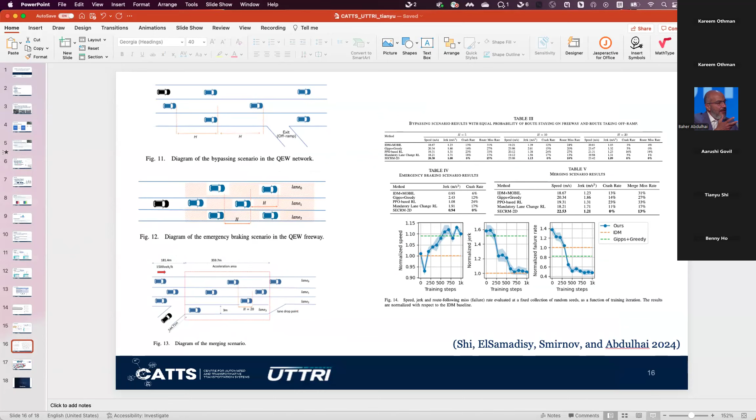Do you mean here? There was a slide earlier about the SECRM model and testing under regular driving, emergency braking, yes, here. So can you just slowly explain that again? What happened with those crashes?

In this case, we consider there's a leader vehicle and a follower vehicle, and we consider the same leader vehicle for all the baselines. The leader vehicle will take an emergency brake, so the follower vehicle needs to react in response to this emergency brake. A good model that can guarantee safety can handle the emergency brake situation without crashing.

So from the result, we can see on the left. We know firstly that different time gaps will result in different behavior. So for fair comparison, we first construct the left part experiment. We use the same time gap for all the models, same as our SECRM target time gap. We find that with the help of our formulated SECRM constraints, our model can avoid crash, and our model can have the least jerk compared to the Gipps model.